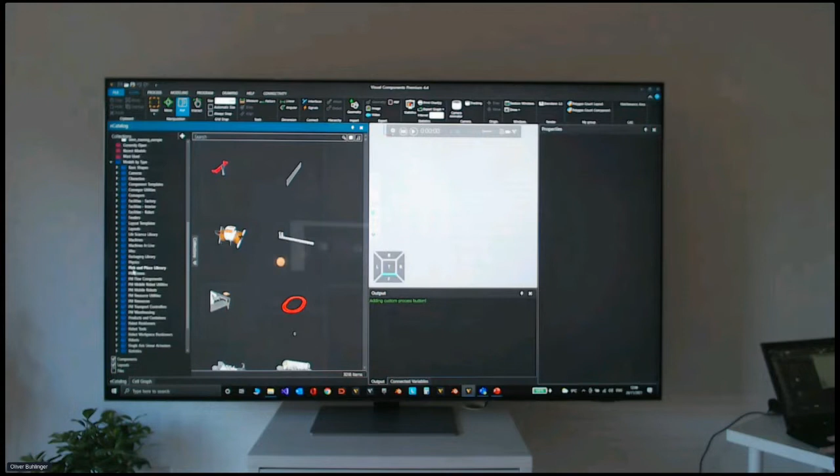First, I want to show you the library in here. This is the interface of the software. You can see a lot of models come as standard with the software, and they have feeders, different types of conveyors, and these are parametric components. You can create your system by drag and drop to here.

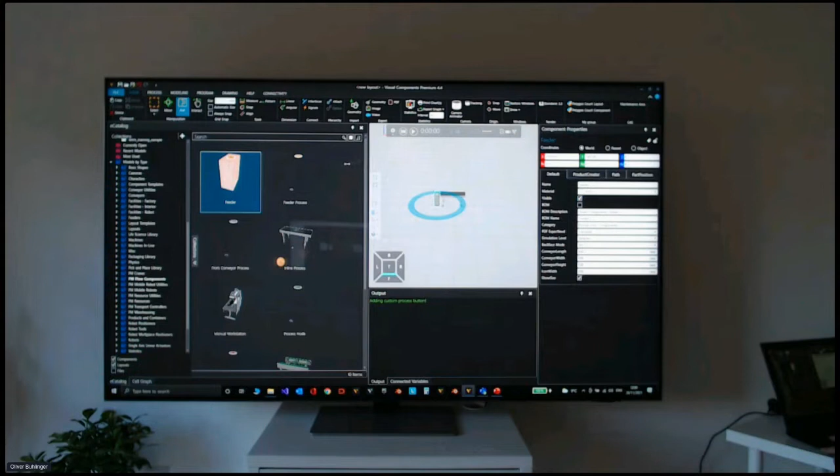You can go here. When I drag and drop, they automatically connect each other, and this is as simple as it is. When I take this one and make it bigger so everybody can see, it immediately starts working. It's just a simple conveyor feeding system, and everything starts with this. Then you can create your flow, products, everything, and put your resources.

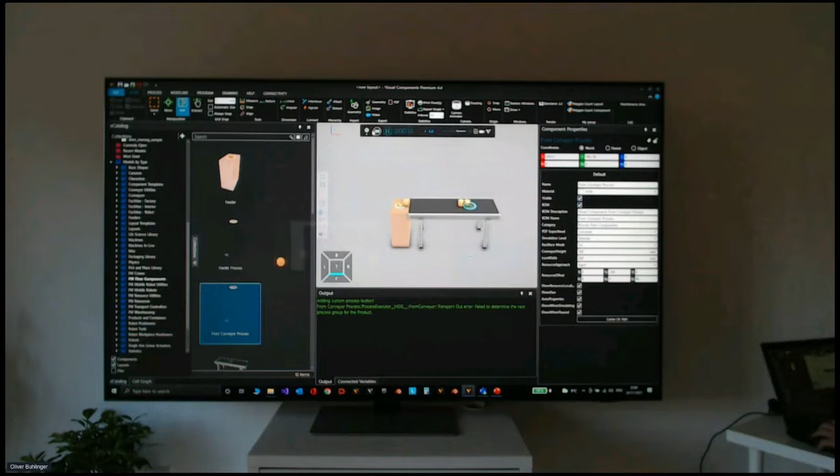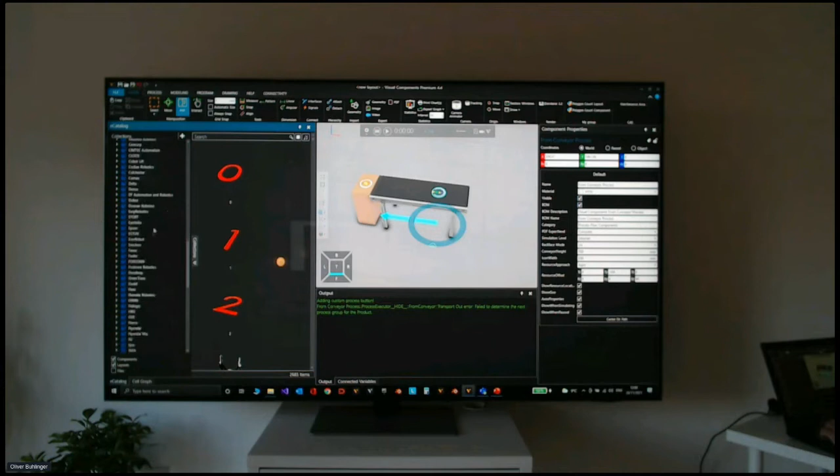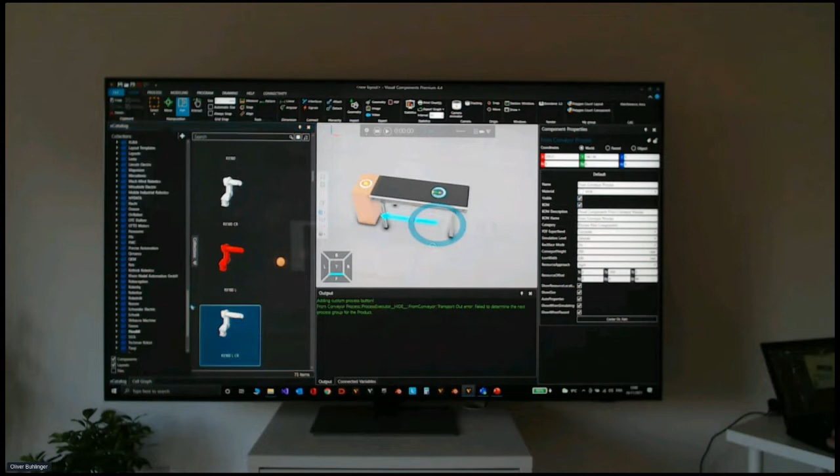Pick something big. Yeah, oh it's paint. Yeah, pick this one. Yeah, put it in here. Another advantage of this is you don't have to be a robot expert, and you don't need a very complicated skill set to use this software.

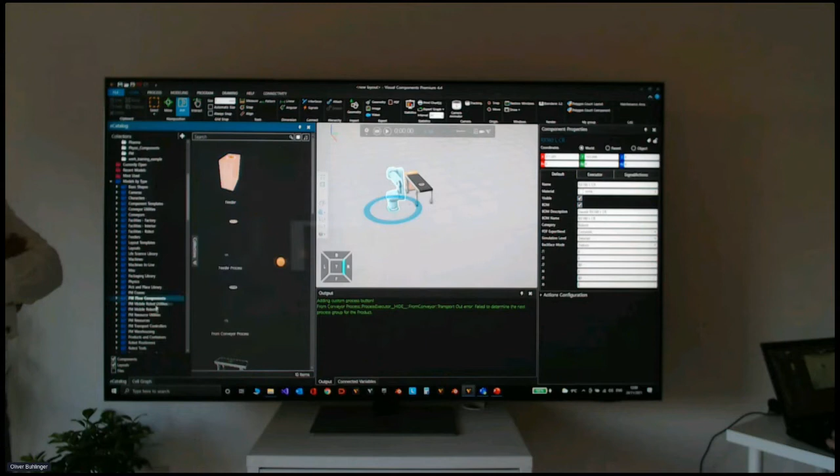Because if you don't need very complex programming in your workflow, you don't have to program the robot, because in normal cases there's pre-written automatic code inside.

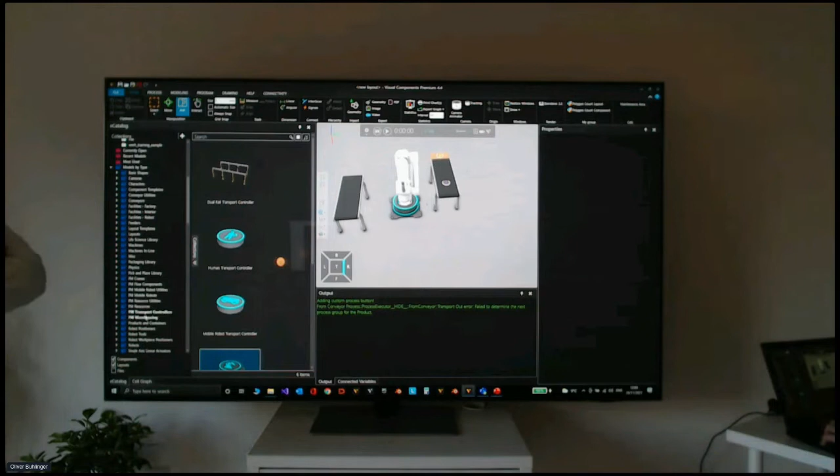Okay, I think you've got one minute left. Okay, I'm not sure when we're... I hope I can finish. No pressure. Oh yeah. Make it a bit closer.

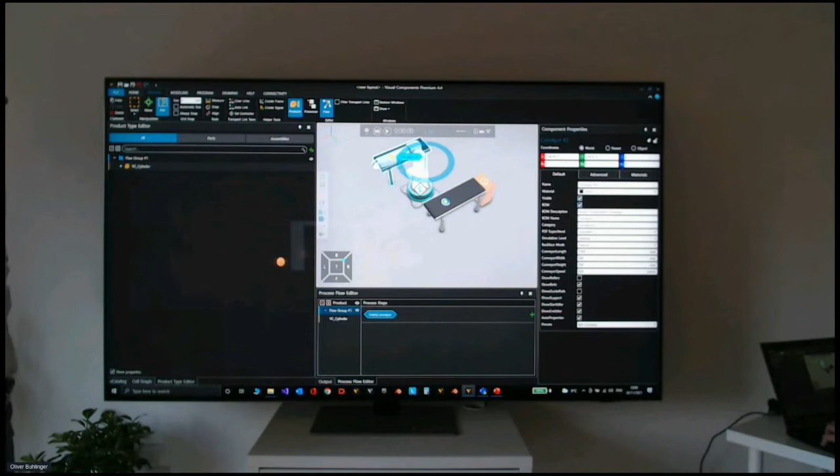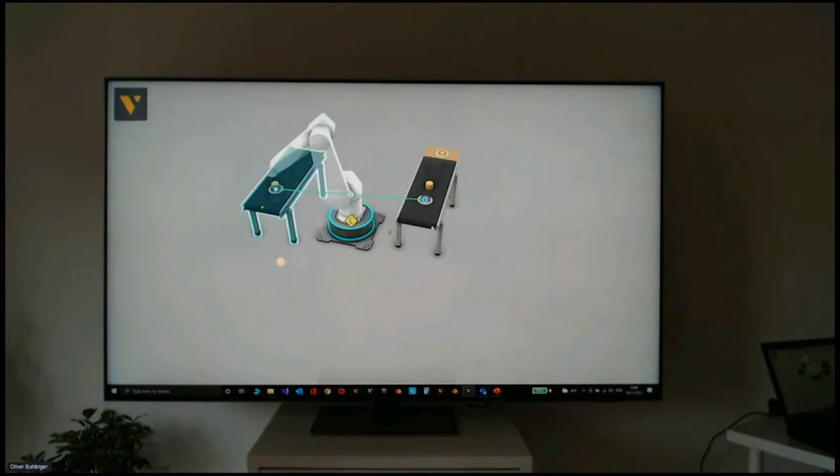The only thing I need to do is define my flow like this from here by using this, from there. And fingers crossed. Wow, and in that amount of time, we can create a simple pick and place cell. And then, if you can spend enough time on it, the limit is...

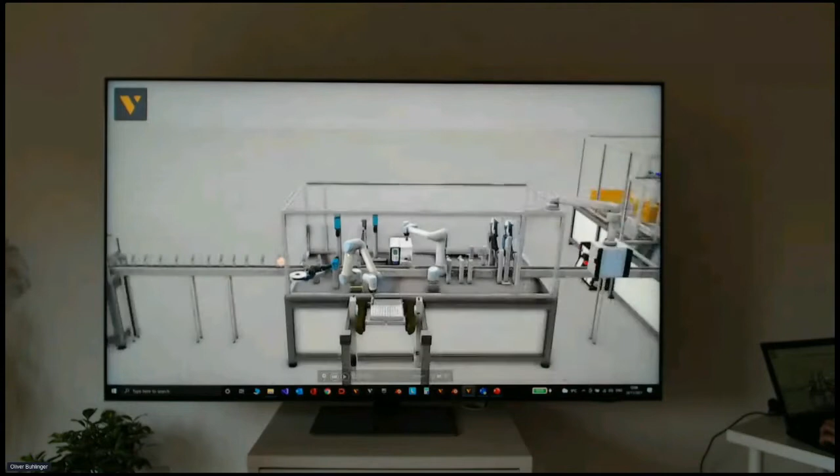Chetan, I think we need to jump to the ITS. Yes, I'm doing right that one. Yes, and then... well, you can have a cell like that complexity, but honestly, not in a couple of seconds.

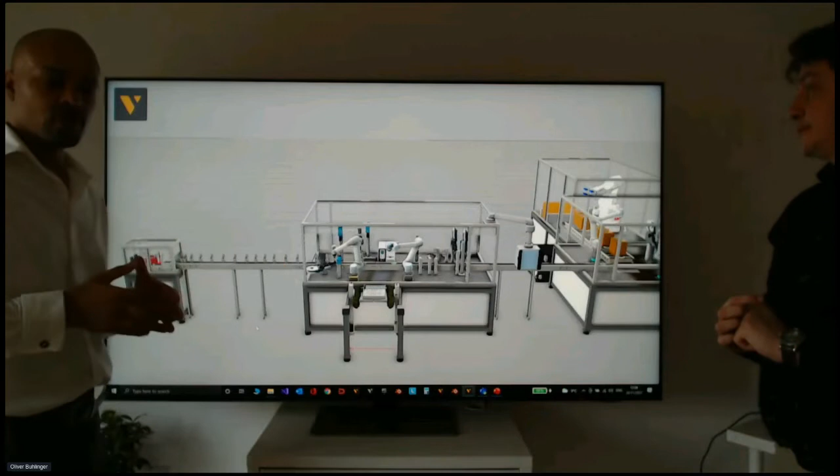I think one of the trends in pharma and some of the projects we've seen is localization of manufacture, because to comply with environmental and sustainable development goals, you need to try to limit transporting materials, medicine, and these kinds of things. Localized manufacture is perfect, where you can almost put a factory into a small facility rather than one giant facility somewhere else.

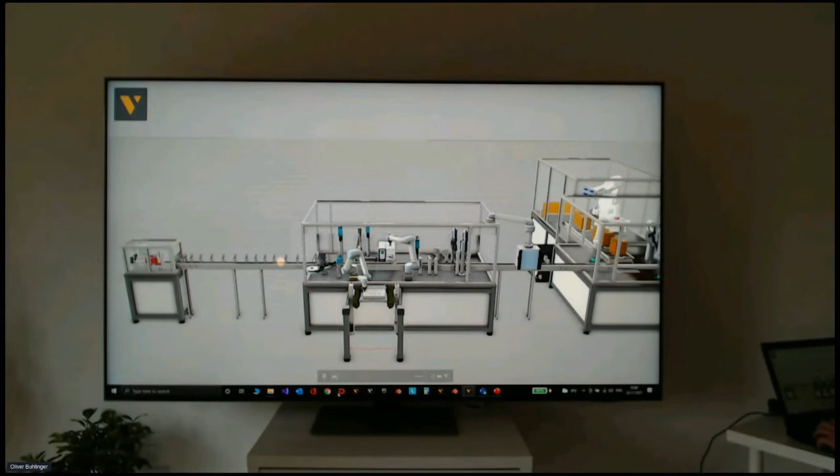If you jump to the PowerPoint, we'll show the short video of that project. Yes, if you jump straight to it... it's coming. Yeah, it's not the next slide. Next. Yes, yes.

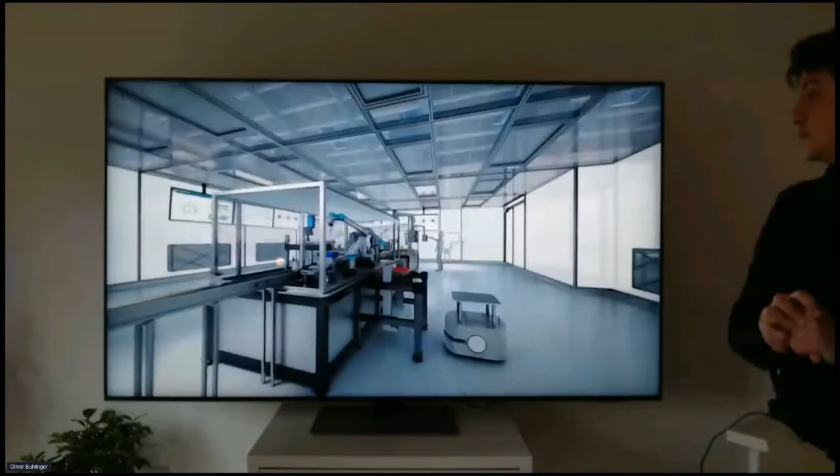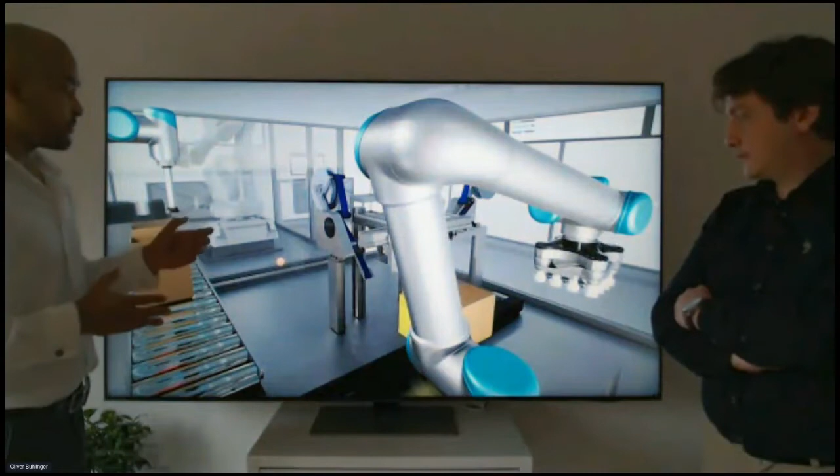I think we've run out of time, but we're really excited about working with ITS. This is one of the solutions they provide, system integration and technology solutions to pharma, and this is really to showcase their capabilities. This is basically a make-to-order process where there's almost no human interaction, where you can have an order for a specific person configured in that production line, packaged, labeled, control checks, and then there's a very tailored robot tool to pick the vials, scan them, and there's a lot of complexity in real life.